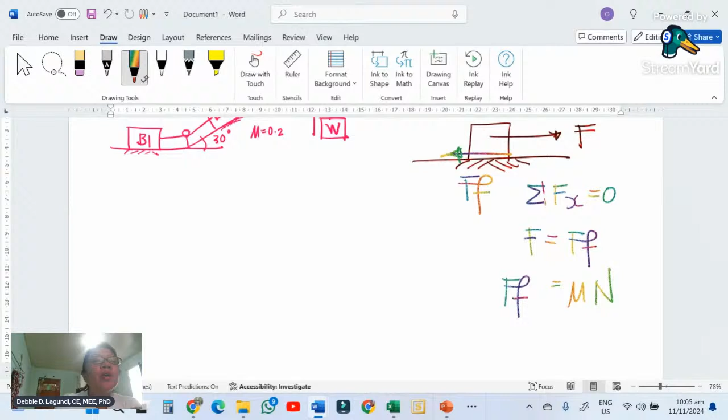Now, if you sum forces along X and equate it to zero, then F should be equal to the frictional force. The frictional force formula is given by mu times N. N is always the normal force. Where is it located? When we say normal, it is perpendicular to the body. So of course the body has a weight, and the normal force is always perpendicular to your plane - that is N. Always. And our formula is always mu times N.

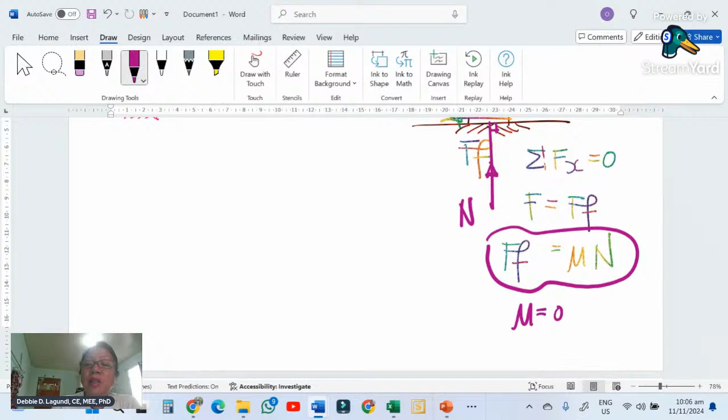Mu is the coefficient of friction. It depends on the material to which the body is resting. So when it's resting on a rough surface, it depends on the surface - is it rock, is it steel, is it cement? All of these already have their values of mu. This is mu - you pronounce it as mu, okay? Like a cat, mew.

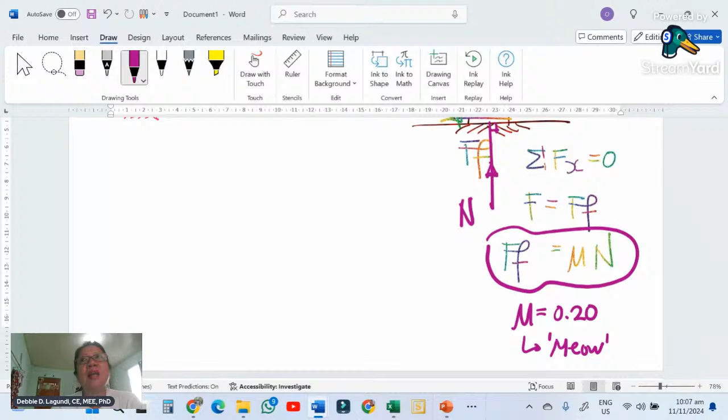There are so many disturbing sounds. So let's take up the system of blocks, because in my topic and in the question I gave in the exam, it's all about system of blocks in friction.

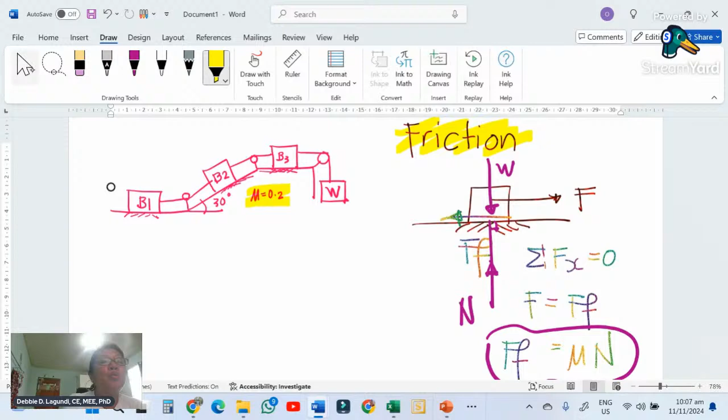Now, all surfaces, as you can see here, the mu is 0.2. But we need to put in some weights. So if you look at the figure, we're going to find the value of W. Let's put on some weights in each of the blocks.

Block 1 will have a weight of, say, 10 newtons. Block 2, the weight is of course going down all the time - say this is 15 newtons. Block 3 is, say, 15 newtons again. What could be the weight? All right, this is a bit long. The one I've given you is a bit shorter, but it has the same system.

Block B2 is on an incline, where the angle of inclination is 30 degrees. B3 is on a rough surface with a coefficient of friction of 0.2. Same with B1, coefficient of friction is 0.2. Now, they are connected around pulleys. These pulleys don't have any friction at the moment - they are frictionless pulleys.

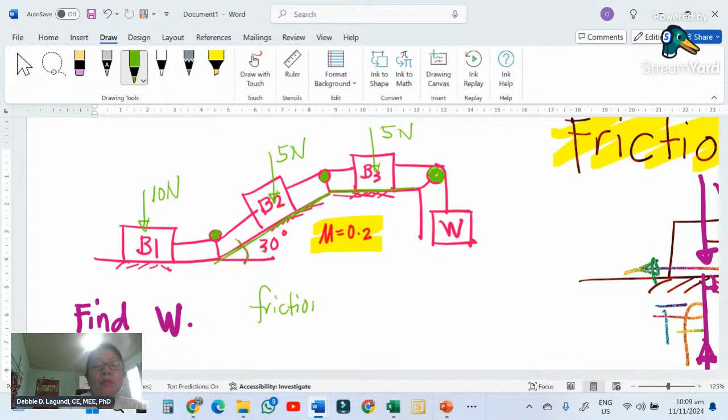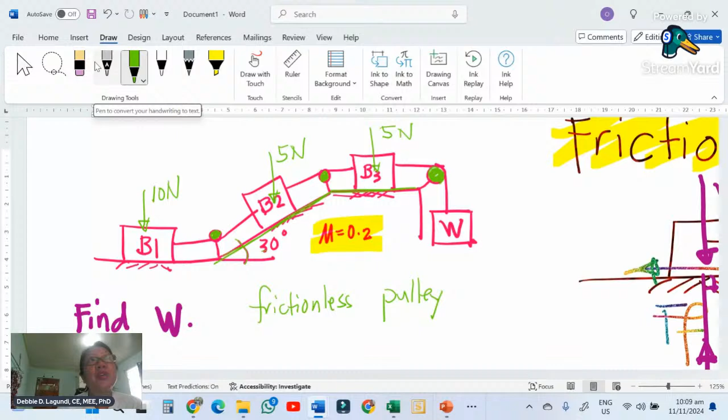If you say frictionless, the strings or cables connected to the boxes won't stop moving. Instead, they're just a medium for the pulley to roll on, helping the pulleys move from one point to the other, or one direction to the other—going up or down, or left or right. All right, so this is what we're going to analyze.

Let's start the analysis. Don't forget that what we're looking for here is the W, the weight of the block. That is the last block in the system.

Given this kind of system, you have to start from the first one, block 1. So you have to isolate block 1. Let's isolate it—I'll make it thicker in size. So isolate block B1, or isolate B1 in short. So you have here block B1. What are the forces acting?

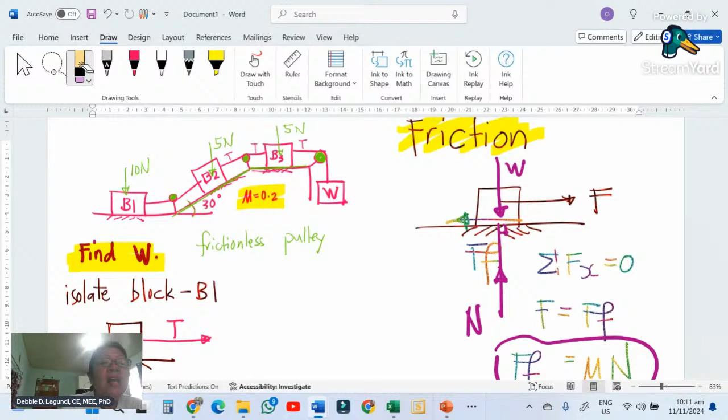One force acting here is the tension on the cord. There's a string being pulled so that B1 moves toward the weight. So that is the tension on the cord. Let's call it T. The tensions here will be the same throughout—the T here is the same as the T there, and there, and there. They're all tensions. However, there will be an effect of the T's as they are on different surfaces, and the T will also have an impact on the inclination and the mu, or the kind of surface where the blocks are.

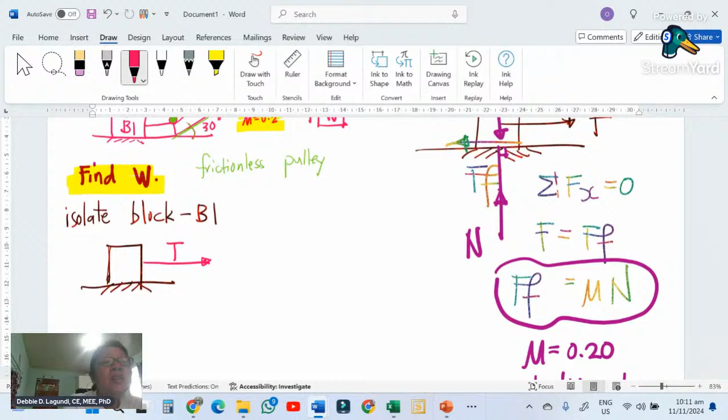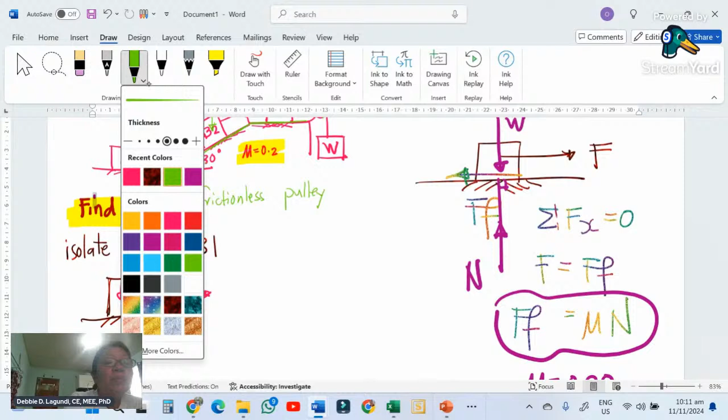So T is one of the forces. We also have 10 newtons here as the weight of block 1. Now friction comes into play. So you have here a normal force N, and because the line of action—A is acceleration—is going to the right, your friction must go left. I repeat: when the motion is going right, your friction must go left.

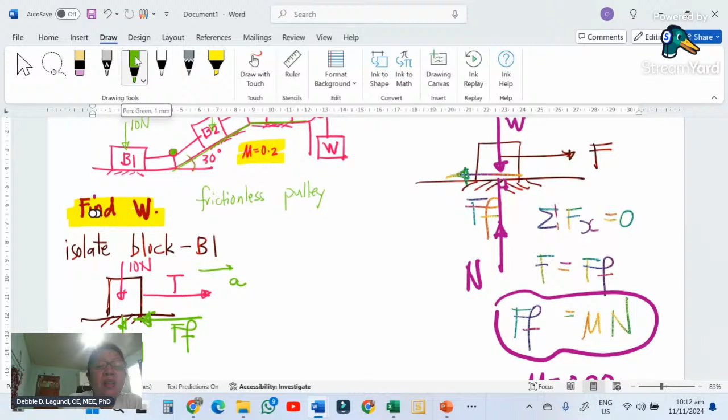Having set all your forces—I repeat, because there's a disturbance, you have a tension of the cord when you isolate block B1. Here, isolate block B1. So you have the tension on the cord, you have the weight. The weight should be counteracted by your normal force N, which is always perpendicular to the plane, meaning it makes 90 degrees with the horizontal. And then the frictional force goes against the motion.

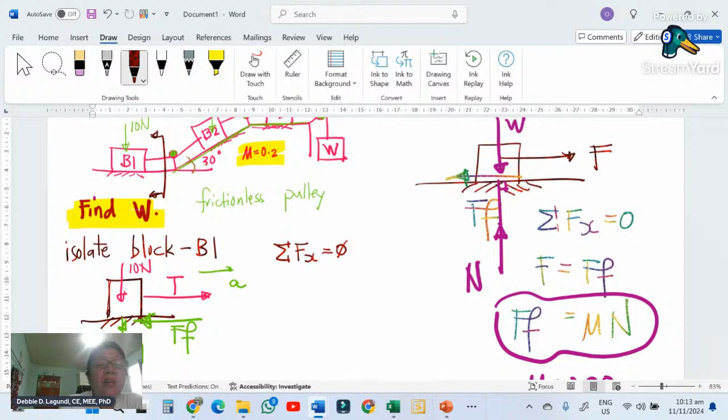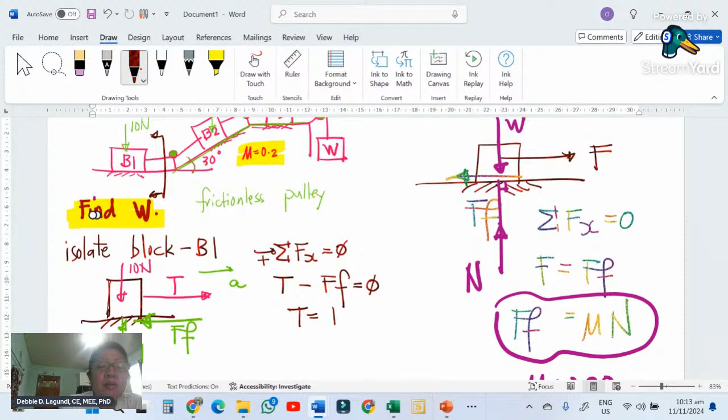What you're going to do here, since we are in statics, is sum forces along the X and equate it to 0. What are the forces going to the right? Because that is our assumption, you have a T going to the right, nothing more. And to the left you have frictional force, so T minus the frictional force is equal to 0. So the tension on the cord on block 1 equals the frictional force. Now, the frictional force is mu times N. What is the mu given on all surfaces? That is 0.2, and the normal force will be the summation of forces vertical.

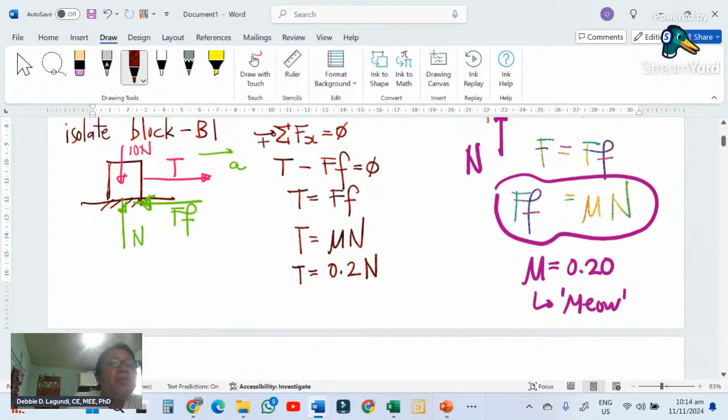Okay, so let that be one of our equations. Next, we need to solve for N. We already used summation of forces X. This is organized calculation: first you do summation of forces horizontal, next is summation of forces vertical, equal to 0, upward positive. What are they? Going up, positive.

So normal force is going up, 10 newtons is going down. N minus 10 is equal to 0, therefore N here is equal to 10 newtons. So you substitute that in equation 1. That will be 0.2 times 10, then that will be 2 newtons.

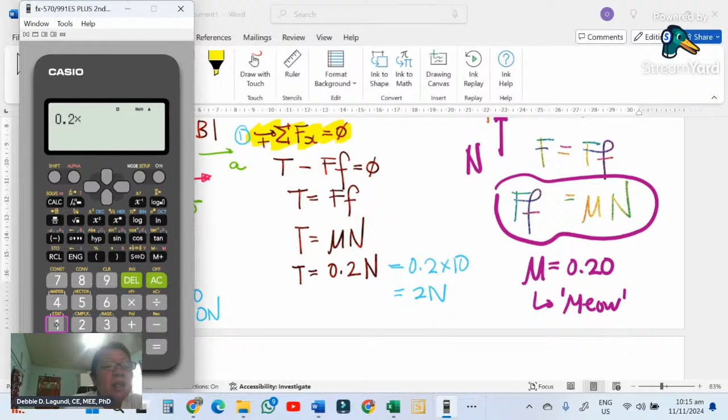Okay, let's calculate: 0.2 times 10, you get 2. So the tension on the cord is 2, and we are right with its direction—its direction is going to the right. If you say tension, it's always going away from the body. So our tension here is going to the right.

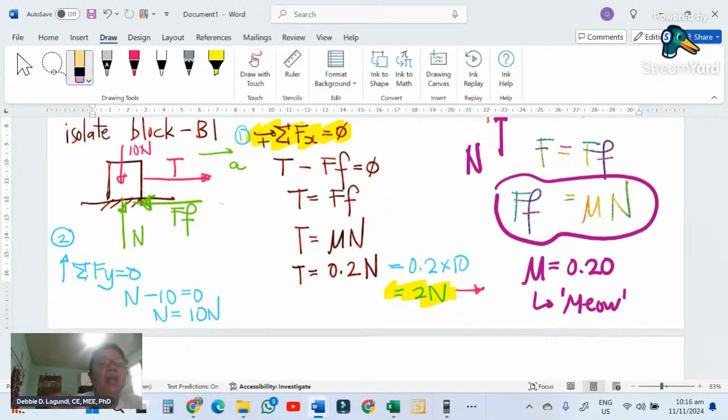Now when it goes to the next block, it must be in the other direction. So we are done with B1. We now move on to B2.

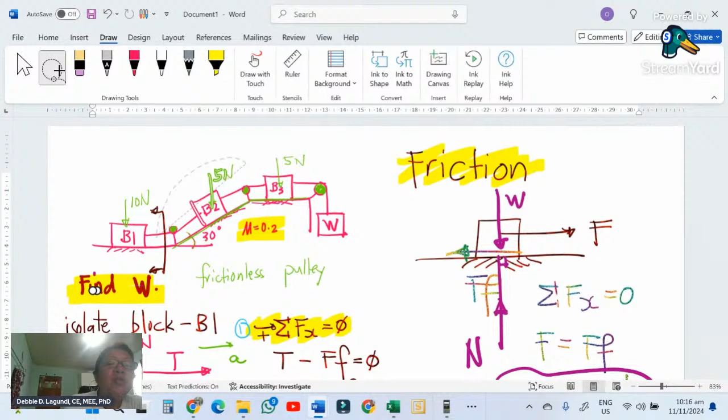So for B2, here you go. I just have cut it. For B2, you have to isolate. We are going to cut it here and cut it here. Okay. So in this case, you have a lot of things to do here.

What are they? Well, I'll make it bigger. There you go. You have 2 tensions in your cord. There is one T here and there's another T here. Okay, so I will call this the T from B1 a while ago, which is 2 newtons. And maybe I can call this one T2. Right? As I've said a while ago, they can all be called T's.

However, you cannot say that the T2 here is the same as T or T1 on the other side. Why? Because the T has something to do with the inclination, with friction, and so on. Okay, so what is the line of action here? The line of action is going to the right. B2 is a bit confusing if you can't understand it well.

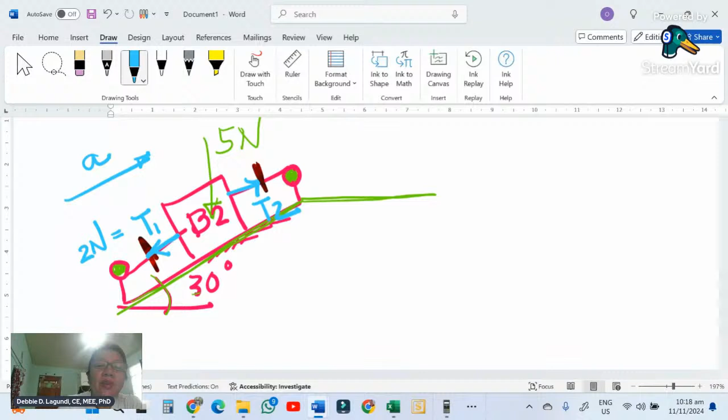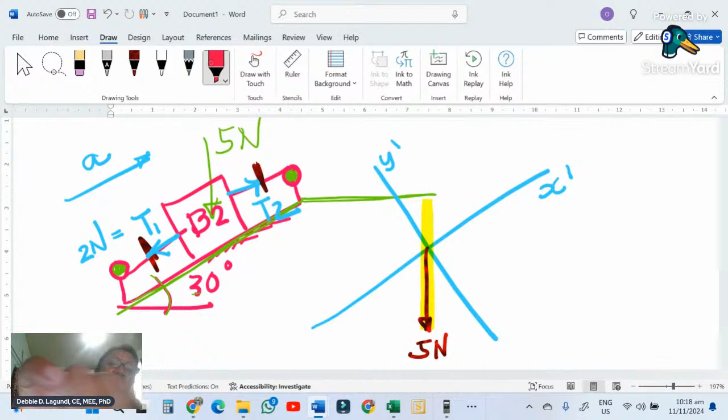Let's draw the rotated axis. Okay, so that is our rotated x. I will call it x prime, and this is my y prime. Okay, what are the forces acting? I have my weight going down of 5 newtons, and because the axis had been rotated, the y, which was originally vertical like this, had rotated to this axis. So what is the angle of rotation? It's 30 degrees because your plane here had been rotated too.

Let's remove that in the meantime. We don't need that. Okay, so here is your angle, 30 degrees, right? Because the horizontal had been rotated 30, the vertical should be rotated 30 as well, because the x and y always go together, and they're always in perpendicular arrangement. The x and the y axis are always perpendicular to each other.

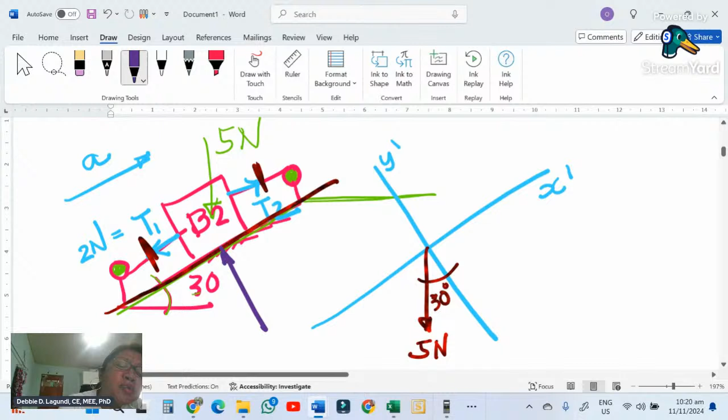Okay, so what are the other forces acting apart from the weight? We have the normal force. The normal force is here. And the line of action is going to the right, so the frictional force will be like this. I think it's better for me to change the colors. I'll use purple for the normal force. The normal force is always perpendicular to the plane. And then you have the line of action going to the right, so frictional force must be going to the left.

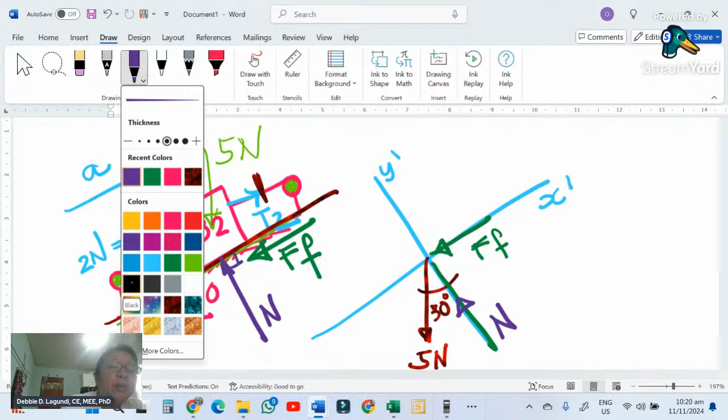We're going to summarize all these forces in our presentation. Okay, so frictional force is over here. What more? The normal force in purple is over here. What more? We have T1. For our T1, I will use black. T1 is our 2 newtons. And then we have T2 over here.

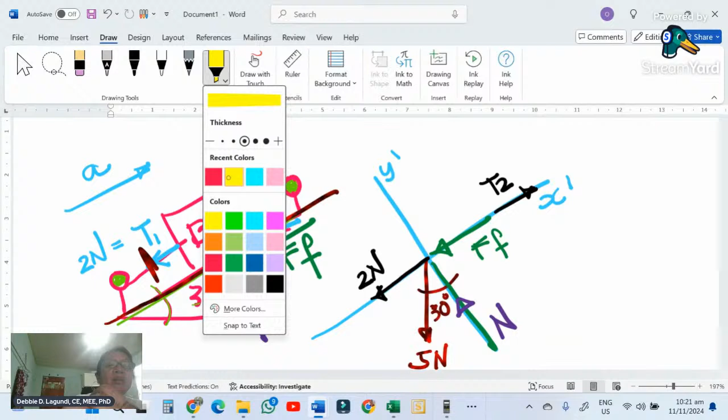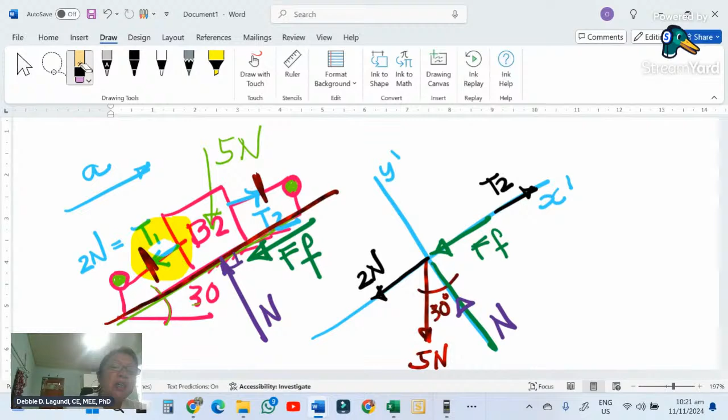There you go. Let's check. Have I included the weight? Yes, I did. T1, 2 newtons? Yes, I did. T2, which we do not know? Yes, I did. The normal force? Yes, I did. Frictional force? Yes, I did. Very good. So all these forces are already in our system. So all you need to do is to analyze this system here.

Okay. Now, because the weight, the 5 newtons, is not aligned with our x prime and y prime axis, we have to resolve the 5 newtons into its x and y equivalent. There is no problem with F because it's aligned. There's no problem with T2, it's aligned. N is aligned with the rotated axis, 2 is aligned, but 5 newtons is not. Okay, so what should we do? We have to align it as well with the rest of the forces.

So here you go. I need gray for that. Right. So our, oh, it's not Vn. Our 5 newtons, this is on the y-axis, 5 cosine 30. This is our 5y.

Okay. Our 5x will be 5 sine 30. This is our 5x. Bakit? Kasi our 5N is vertical. It's not aligned with our x prime and y prime axis.

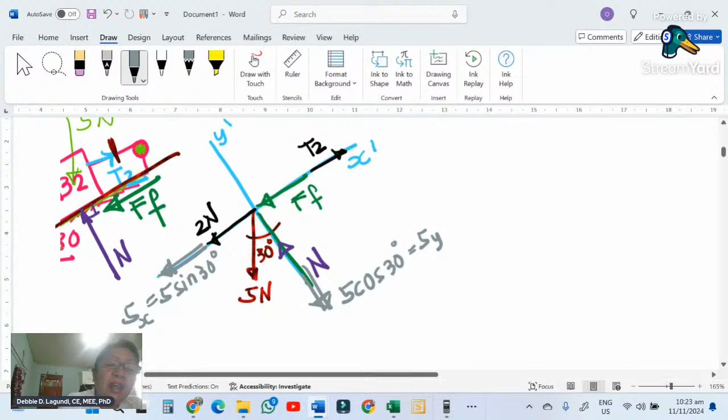Okay? So ngayon, dahil ang adjacent side ng ating 5N, look, if I'm going to do like this, why am I saying 5N, 5N or 5 newtons? And this is our 30 degrees. Ito is the 5 cosine 30 degrees. And then ito, kung saan tinutumbok ng ating angle, is our 5N sine 30. I hope this is clear.

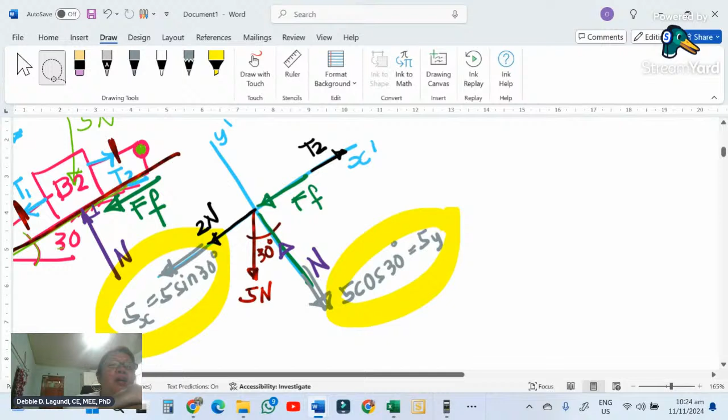That's why ang 5x natin sa rotated x-axis is this one. And our vertical component is 5 cosine 30, which is representing our 5y. All right. I hope that's clear. So we can now proceed with the summation of forces X and Y, but these will be rotated. Okay, so we are ready, and here we go. I want the blue that is like that. Okay, there are only two formulas that we are using.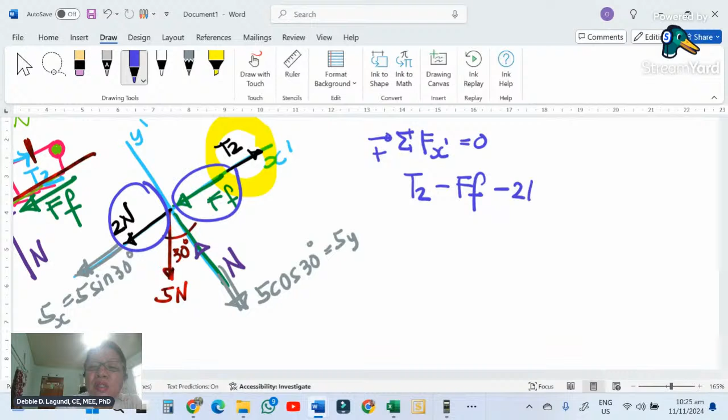Right, summation of forces along the x-axis, but this is the x prime, equated to 0, to the right positive. What are the forces acting? Of course, we have our T2 to the right. And then the frictional force is going to the left, so that will be a minus frictional force. And then we have the 2N, minus 2N because it goes left. And then we have the 5 sine 30, so that's minus 5 sine 30, is equal to 0. That's all for the x for now.

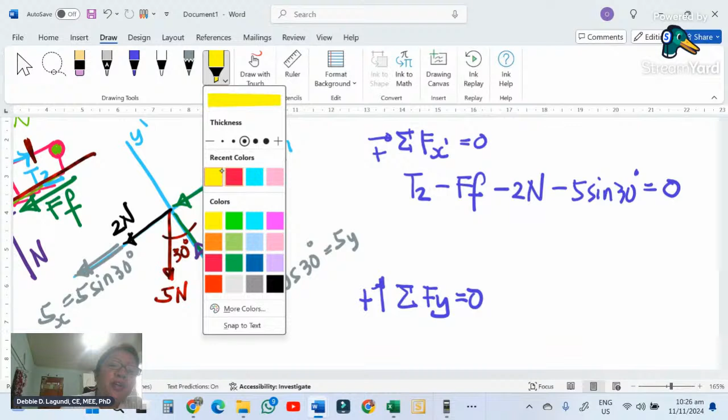Now, for the summation of forces along y, equated to 0, upward positive, let's see what we have in here. Let's remove all the excess muna and give emphasis to the forces along the vertical. You have N and the 5 cosine 30. So upward is N minus 5 cosine 30 is equal to 0 along the vertical.

Okay, I am slashing my 0 to say that that is a 0. But in civil engineering, the 0 with a slash is a symbol for diameter. But in computer engineering, or in IT, that is 0, right? Oh, where am I now?

Right. Now, there are only two formulas that you're going to use in here. There's no moment whatsoever. Why did I use summation of forces vertical? Because I want to know the normal force. That is 5 cosine 30. And this will be substituted to my friction. So let's calculate that one.

You have 5 times cosine 30. Oh my God, I'm not in degree. Hang on. Shift mode. I must be in degree because this is in radian mode. Now I'm in degree mode. So 5 times cosine 30. Be sure that you are in degree mode when you're using degrees like 30. But if you're using pi, then you can be in radian mode.

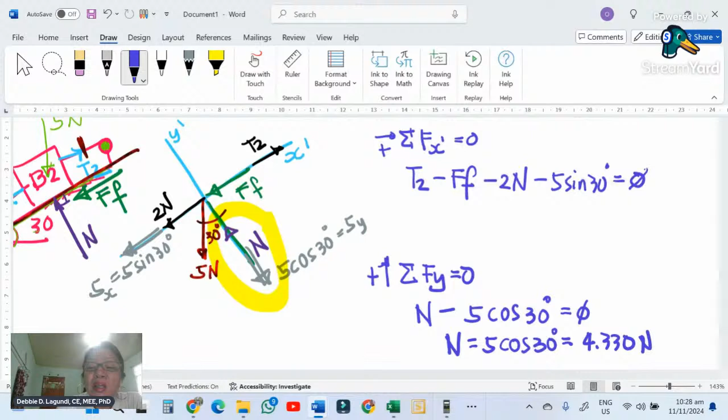5 square root of 3 over 2. That is simply 4.330 newtons. This is our normal force, and we're going to substitute this one to our frictional force in here. Okay, so let's continue. I'll change my pen to red because we're now going to substitute.

Okay, we don't know T2 here at the moment. Our frictional force is mu times N, and all surfaces is 0.2, and N is 4.330, minus 2 newtons. I will not put the N anymore because that might be misunderstood as normal force, minus 5 sine 30. I think this is 2.5, but I have to show you the calculation. 5 sine 30 is 2.5 because sine 30 is 0.5. So that will be minus 2.5 is equal to 0.

As you can see here, it is only T2 that we need to know. I will tell you later why we are so interested in the forces on the strings or on the cable. Let's do the calculation. All the values will be transposed to the other side because these are all negatives, so they become positive. Simply add all these together to get T2. The answer will be positive, so the direction is correct.

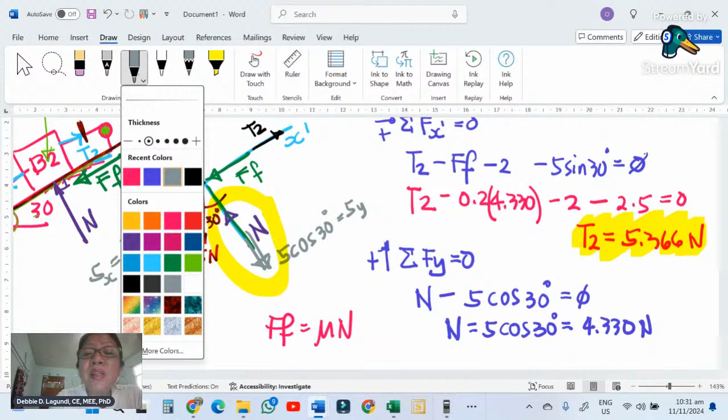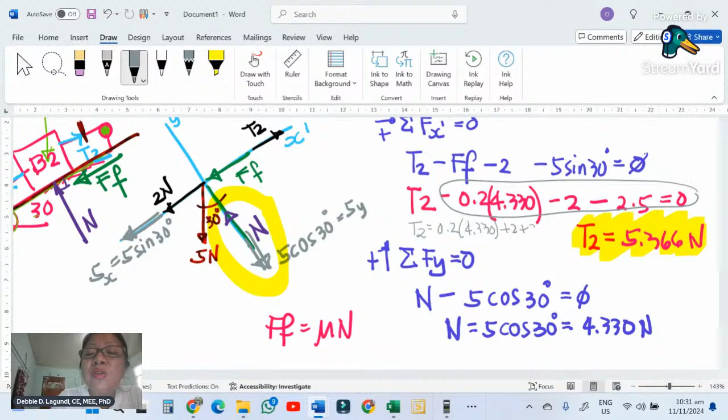5.366 newtons. So that is the value in T2. Why did I add all of them? Because in simple terms, T2 will be moved to the other side, or all these constants here will be moved to the other side. So T2 will be equal to plus 0.2, 4.330 plus 2 plus 2.5. So T2 will give you 5.366. Okay, so we're done with B2.

All right. Now, why are we so interested with the cables? Because when you isolate the weight in here, the weight will have this free body diagram, FBD. The weight is going down, and the one that is pulling it up, or the one that is making it static on its position, is the cable here, the T here. So if we know the T, then we know the weight by virtue of summation of forces along the y-axis. So that's the reason why we are interested with the T.

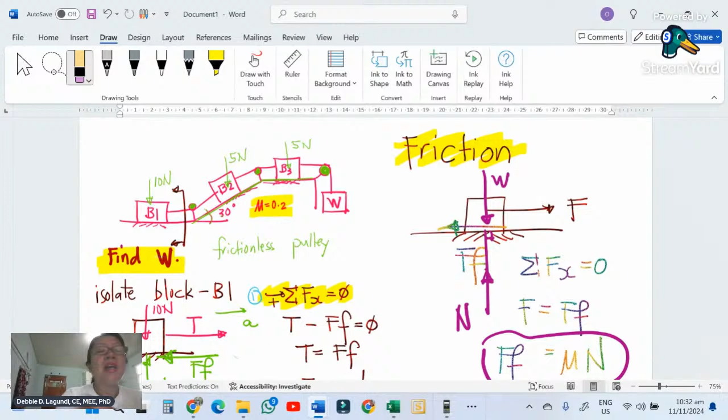Now, we are done with B2. The next thing we're going to isolate will be our B3, and we are near to the answer, what we're looking for. There, we're going to isolate that.

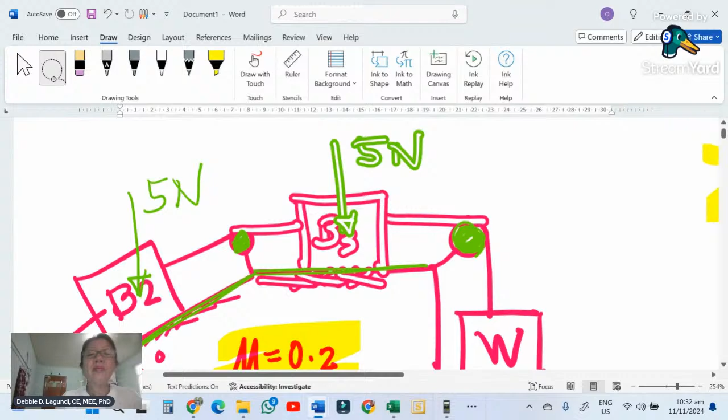I hope you are all there, and I'm not requiring everybody to be present in this video, but I just made it live so it will be recorded automatically, and I can just share it and then you can view it, because I just don't like to record like I'm the one only talking. I must have an audience, because that could be silly for me to do. Oh, that's too thick. Hang on. Right, here you go. That's too thick.

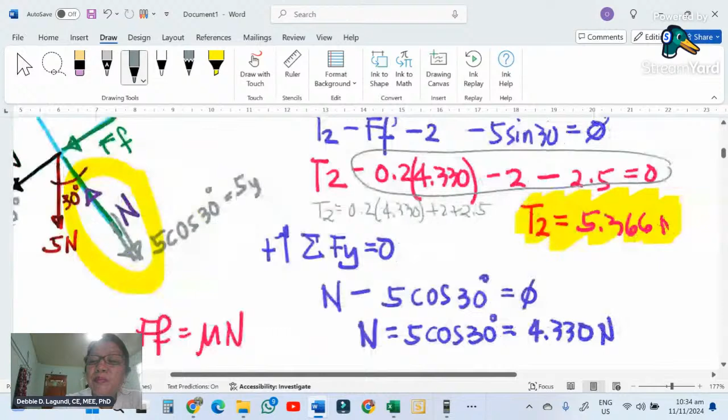I think that's better. Okay, so now we are going to isolate the third block. And what are the forces acting here? Right, I will use gray. What are the forces acting? Of course, you have the T2. This came from B2 block. It's 5 point... let's have a peep. What was it? It's 5.366. Okay, let's go back there. 5.366.

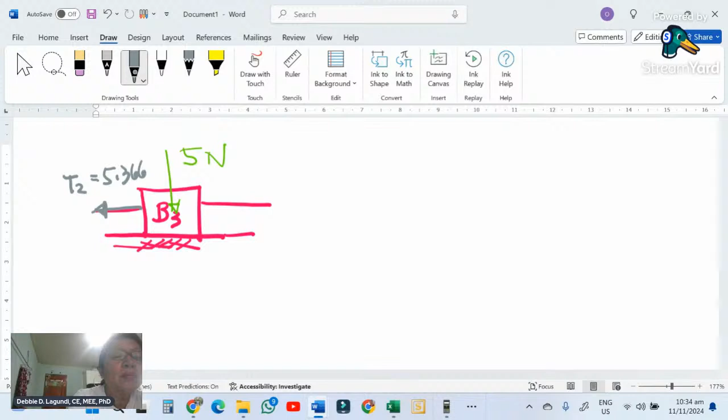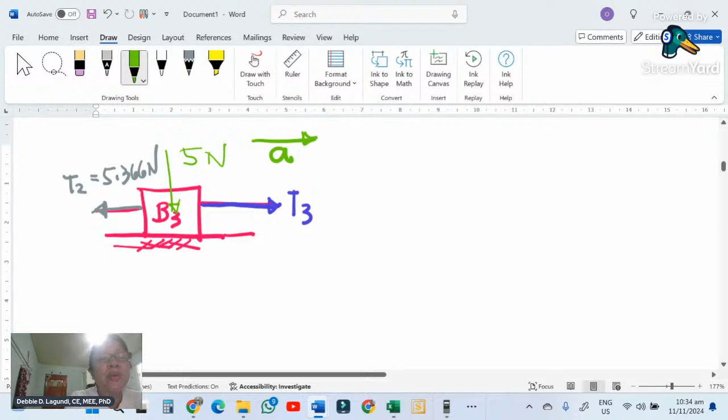And now you have an unknown T here. I'm going to use blue for that. And this T would give you the answer after. So this T3 will give the answer of what the weight is. All right. So anyway, let's analyze first what are the forces acting in this FBD. The line of action is going to the right. So automatically your frictional force must go against the motion.

Right. We are not yet in dynamics, but because we are assuming that the forces acting on this system will be all equal to zero, then in the event that there is motion, when there will be excess of forces acting on the x-axis or on the y-axis, then there will be motion, right? So now we are assuming that that motion is zero, but we can use that calculation to solve for unknown forces. Okay, so line of action is going to the right, so the frictional force goes left.

And what other forces acting here? If there's a frictional force, there must be a normal force, normal to the plane all the time. Let me just say that again. If the body you're analyzing is along an inclined plane, then your N is always perpendicular to the plane. And if the motion is going right, then your frictional force goes against it. If there's a weight, then the weight is vertically down.

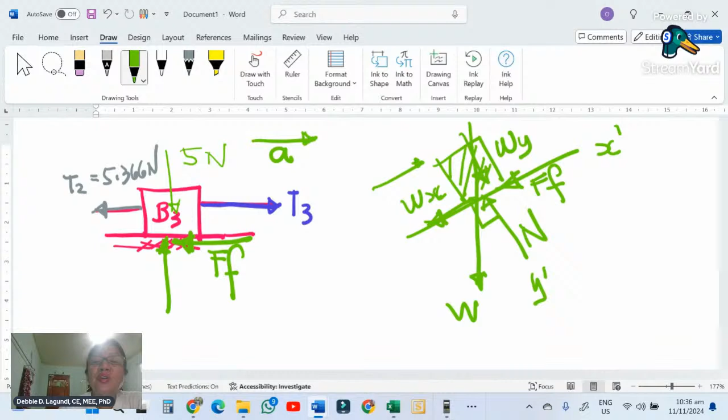It seems that the weight is inclined, but no, we rotated our x and we rotated our y. We are calling that y prime and we are calling that x prime. And this is the weight. Okay. In this case, you must resolve your weight on its Wx and resolve the Wy of your weight as well. So these are the forces acting.

Okay. Now, it depends on where your body is acting, if it's acting along the vertical or acting along the horizontal. Okay. So now it's acting on the horizontal. These are the only forces that we have. What are they? Let's see. Let's sum forces along the x-axis. Summation of forces along x. This is actually the second to the last part. Is equal to zero. To the right, positive.

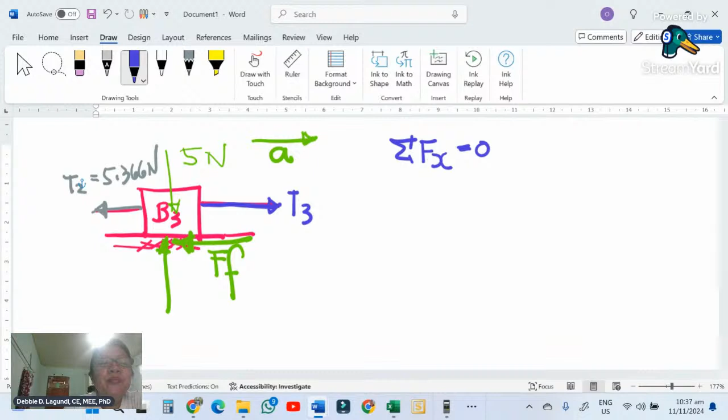What are the forces? Of course, you have your T3, which will be our basis to find for W. You have T3, what's happening to my pen. We have T3 to the right, positive. What more? We have frictional force going against the motion, so that's a minus frictional force. We have minus T2, or I'll directly write 5.366. That's what we got a while ago in newtons. There are only three forces along the x. We have that and we have this one. And we have plotted them properly and correctly.

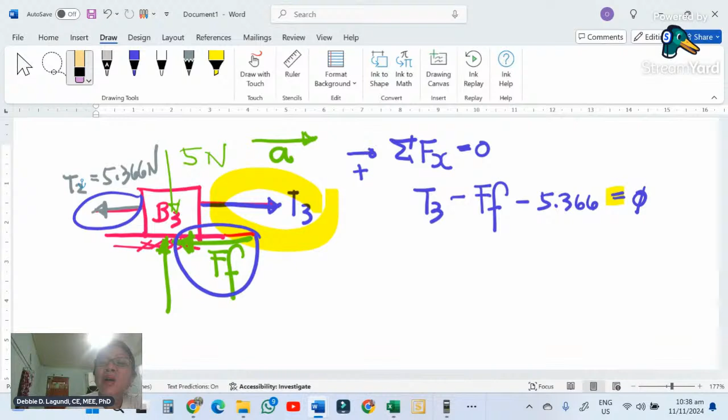That is equated to zero because we are in statics, aren't we? Of course. Next semester will be your dynamics. There you go. Okay, so now we are ready for frictional force. However, frictional force is equal to mu times N. And N can be calculated from summation of forces along y and equated to zero as well, upward positive.

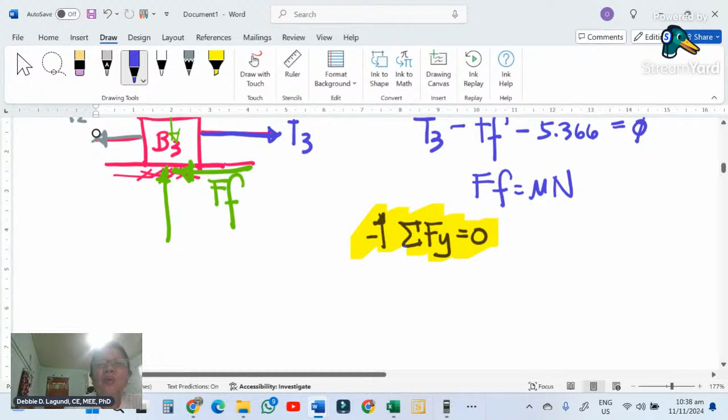Okay, so it's always like that. I am repeating from the top for 10,000 times. This is my 10,000th one. So first is the summation of forces along x, summation of forces along y after. Now, why do we need to do summation of forces along y? Because we need to know our N. Okay. So this is our N. Let's do it.

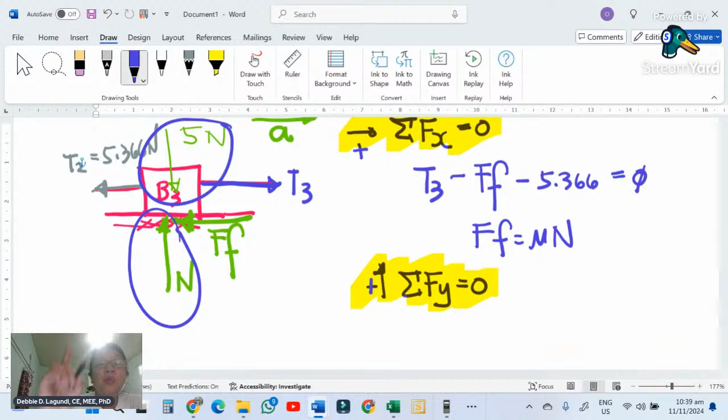So what are the forces acting along our y? We have the 5 newtons downward, and we have N upward, because our sign convention is going upward positive. So that will be N minus 5 newtons is equal to 0, or you have N is equal to 5. Knowing N is equal to 5, you can now go back here, substitute your mu equal to 0.2 and your N equal to 5, and you get a frictional force equal to 1. 0.2 times 5 equals 1.

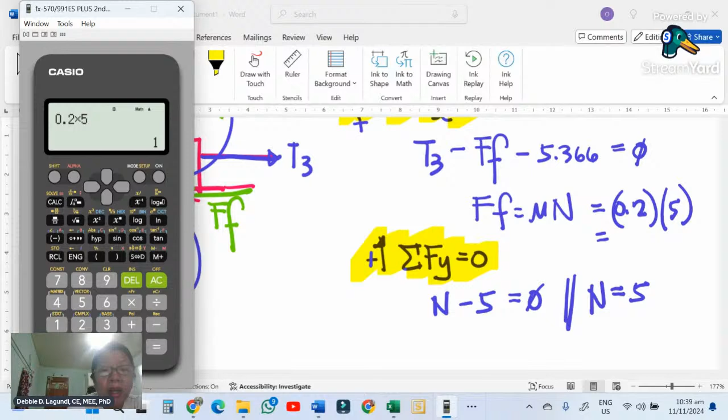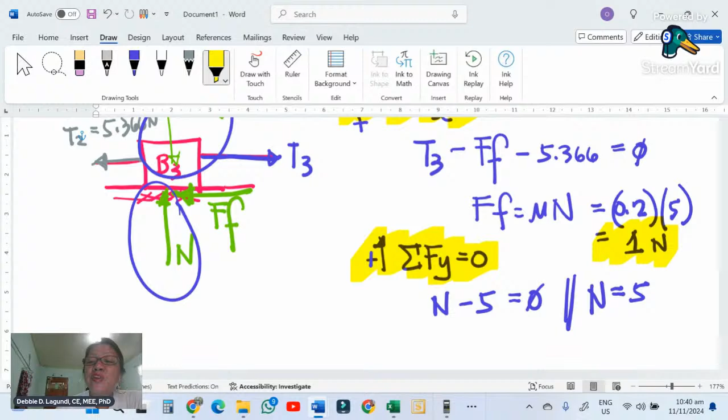You can do it in your head, but I just want to use my downloaded Casio for demonstration. So this will be 1 newton. Right. So we know the frictional force. We don't need the normal force anymore. So let's go back to where that T3 is, and let's substitute values. So T3 is here. My God, it's slow. T3 is here, minus frictional force of 1, minus 5.366 is equal to 0.

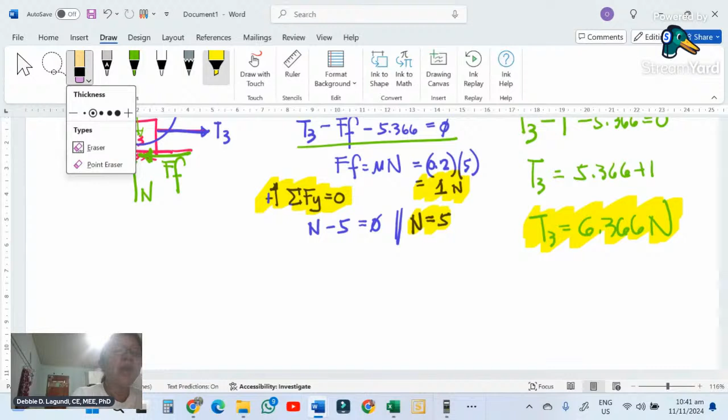Now, you are interested in T3, so that will be 5.366 plus 1, because you have to transpose it to the other side of the equation. So this will now be 6.366 newtons. And that is the tension that is holding your W in its position. All right, so that's it. Now let's erase this one here. By the way, I'm going to send this lecture as well in your GC.

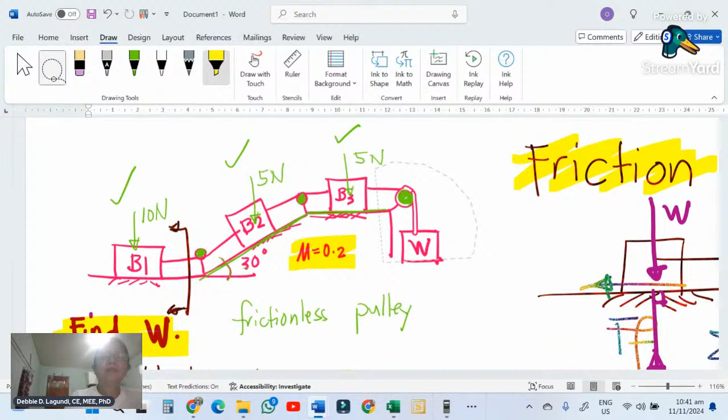Right, so now we'll go back to where we have started. We have isolated our B1, our B2, our B3. Now we are going to isolate our weight. Our weight is to be isolated, and that will be the last part.

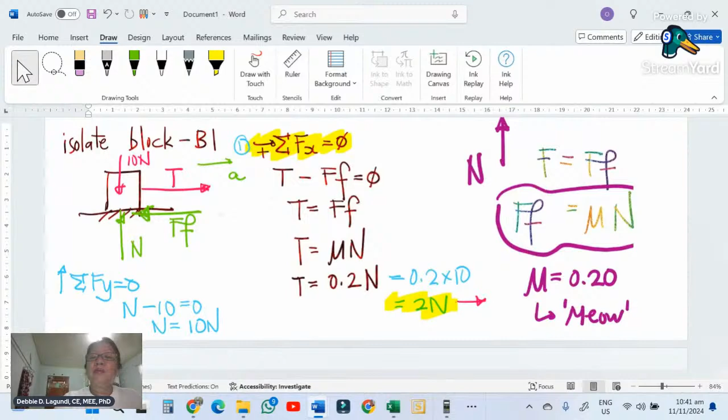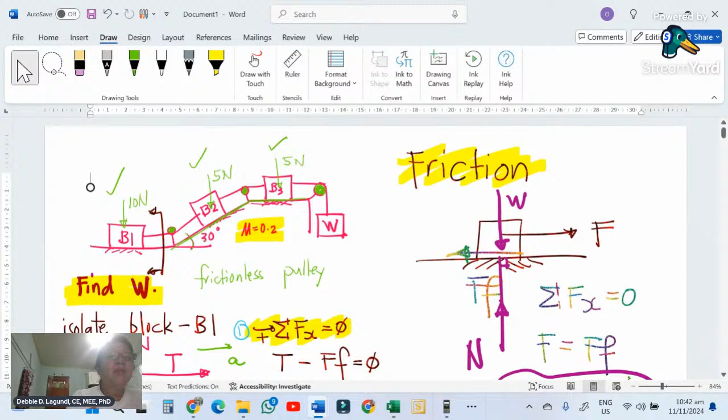Hey, I have to go down here. Why is it taking that long? You know, when my laptop is saturated with a lot of writings, then the tendency is, hey, look at that. Do I still need that one? No more. See? Okay, let's go down very quickly, because I know that you want to finish this off now.

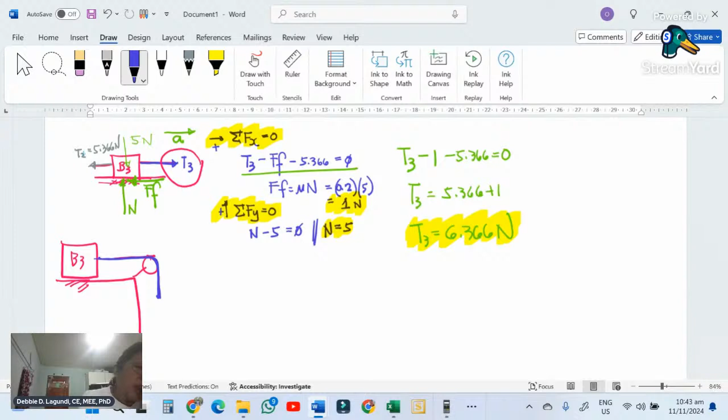Okay, so we were there a while ago. I'll just have to draw it because it's easier to draw rather than copying. So let's connect our system from T3. There's a frictionless pulley here, and this is block 3. And this is actually your T3. Why T3? Because the pulley is frictionless, so whatever force you computed from here will also be the force that is trying to put that weight in its position.

So if we're going to isolate the last block, you have T3 here. Tension is always away from the body. It can never be compressive. It's tension. So this is the weight. So summation of forces vertical is equal to 0, upward positive. You have T3 minus W is equal to 0. So W is equal to T3. And the answer is 6.366 newtons.

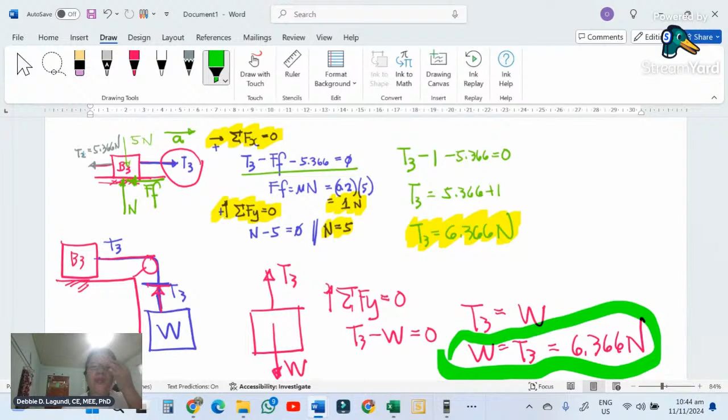When the answer gets negative, it means the directions of your forces are not the right way. It should be the other way, because these are all vectors. Did you understand? Very good. I just have to shade the answer. There you go. Hooray. We're done.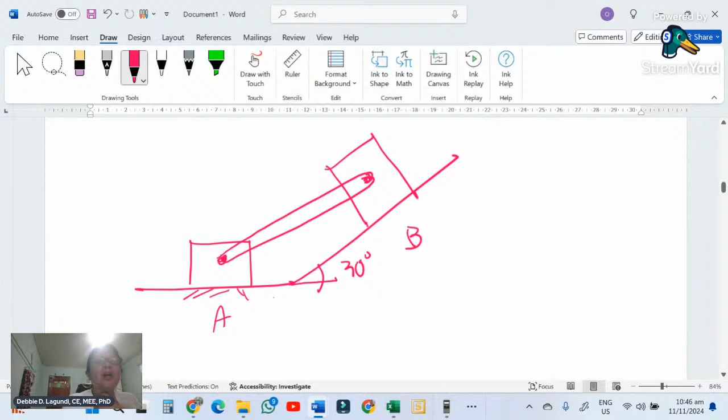A is controlling the block to go down, so the movement will be going down here. That means friction should go against it. There's a normal force here. Now, because this is not a string directed like that - that is T1 when you cut it - no, it is inclined this time.

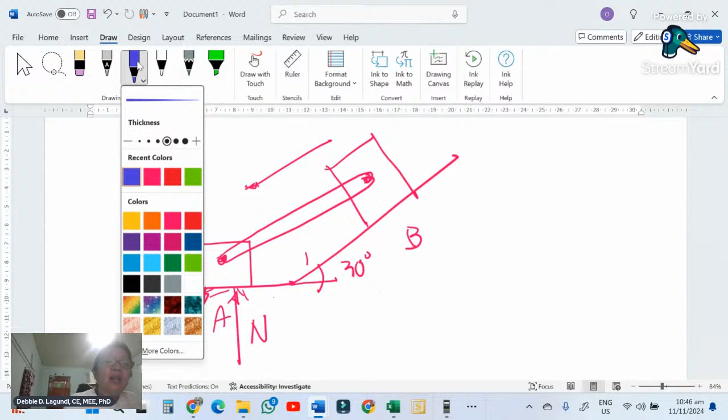The force is inclined, understand? The force here is inclined. It could be compressive - it cannot be, because this is like a rod, yeah? So this is trying to push your A so that B will go down, but A doesn't want B to go down, so it has to control its movement. So the force will be going to the right.

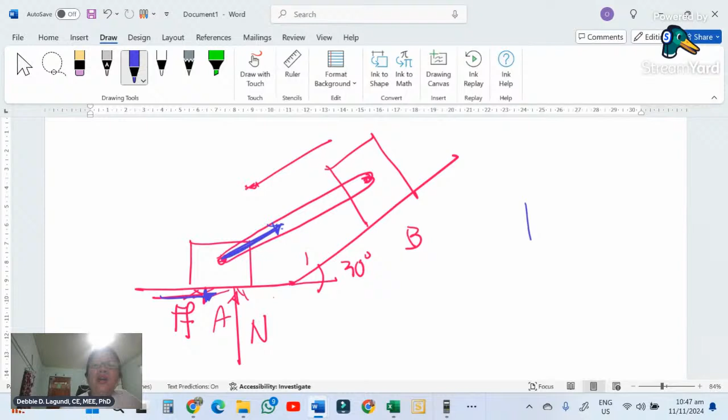And also, this must go up like that. When it goes up, then your free body diagram will have friction going to the right, normal force going up. You have the weight of the block, and you will have a tension, or well, a compressive rod - I'll just call this one P. It will be going that way.

So P will be resolved into its components - you have Px and Py. So in the y-axis you will have Py and W, and in the x-axis you have Px and the frictional force. So look for a question like this.

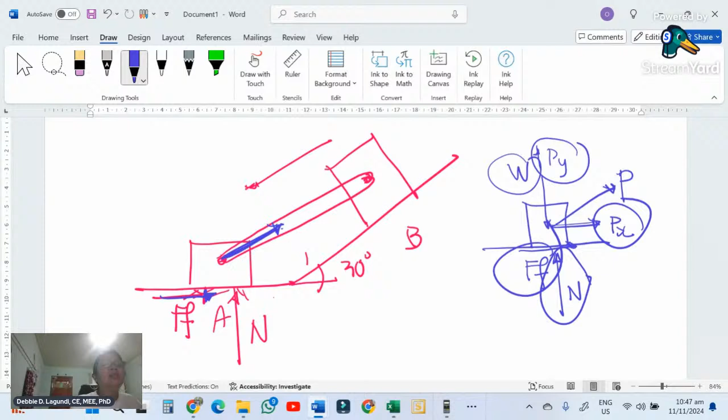This is a question I included in the exam as well, but I guess I have completed everything for the first question. I just added one more block here in this example - in the exam you only have 3 blocks, so that's already a bonus. I'm just trying to help you out because I know there are a lot of students who failed during the prelims.

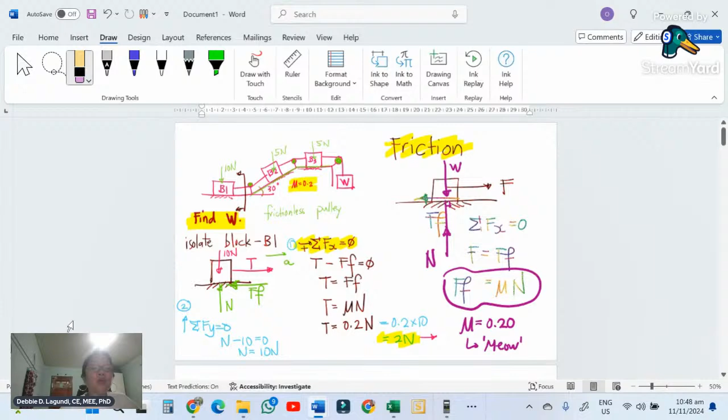Oh dear, did I not... stop the screen? What do you mean stop the screen? Did I not present it? I have talked a lot already. Did I not present it? If I did not present, then oh dear me, that would be a shame. I hope I did. Did I present? Oh gosh, can I just look at my video? Hang on, I have to do it all over again if I did not share my screen - that would be silly. And I will discard... I hope I did. Oh, I did. I'm seeing it here, I did. Oh, thank you. I have to tuck my shoulders. Yeah, I did it, I did it.

All right, so if you had seen these explanations here, then you are ready to receive the computations, the workings, I mean, okay. So yeah, that's it. I'm successful for this video because it's a bit long. I cannot do it again, and it's a first-hand video.